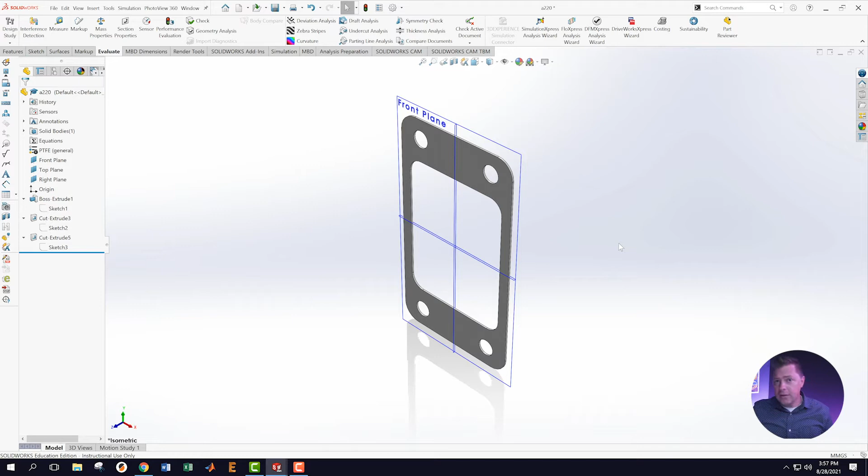The goal was to actually try out all of these different things where you learned, for example, to hit S to get to the sketching commands, or to hold shift while clicking entities and then unclicking and getting to the geometric relations. This is really what we were after in these exercises. Now, to just wrap this up, why don't we take this and put it on the turbocharger, which is not necessarily one of these activities, but we're just going to do it just for fun.

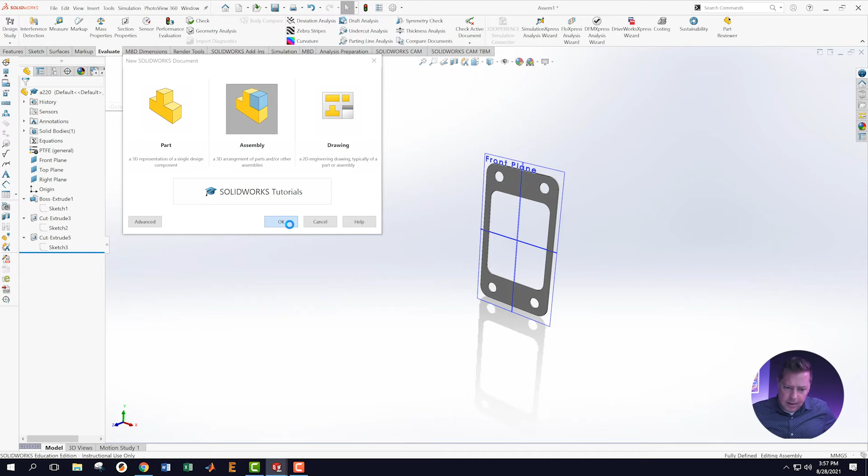Okay, let's save this thing. We are going to come in here. You don't have to do this, but we might as well just show where we're going to be at some point. We're going to have an assembly. We're going to open up our assembly. It's a brand new assembly here. It's starting to be created.

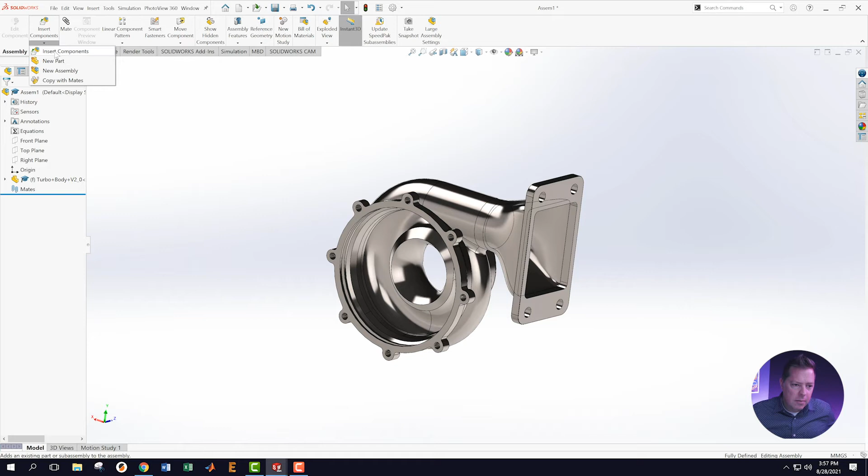I need to get some parts in here. Let's get this one. Let's place it in there. Great. There's our turbocharger. Let's go get a new part. Assemble, insert components, insert this thing. This is our gasket. These are now in the same place, in the same space. How is a gasket going to work?

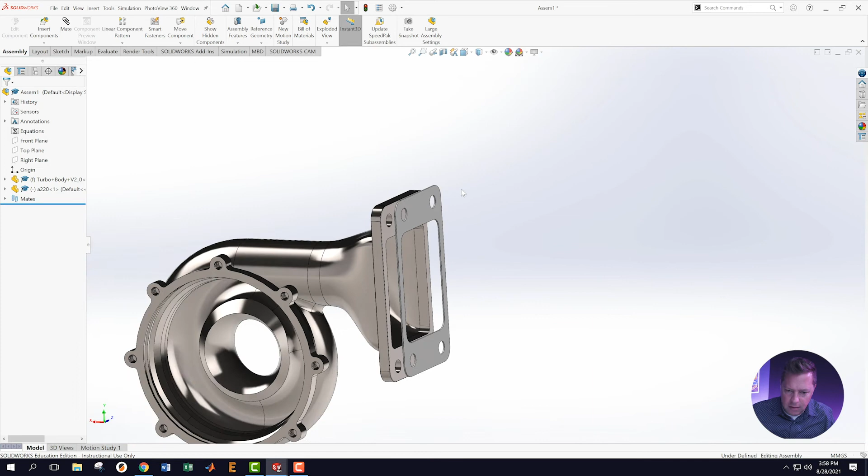I'm going to want to have this face and this face be coincident to each other. Okay, so now they're like right on top of each other. Okay, I'm going to want to have these bolt holes be concentric to each other. So I'm going to grab one of these, tell it to be concentric. And we're almost fully defined, but not really, because I only put one bolt in there, one theoretical bolt.

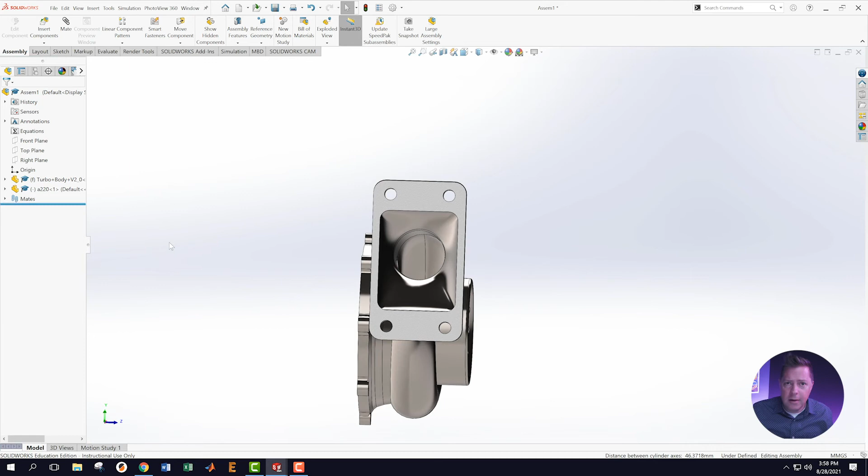You can see I have a little minus sign here in my assembly. That means I can rotate this whole thing around like that, which of course is not what we want for our gasket. So what are we going to do? We're going to come down here and we're just going to put another virtual bolt in there, basically.

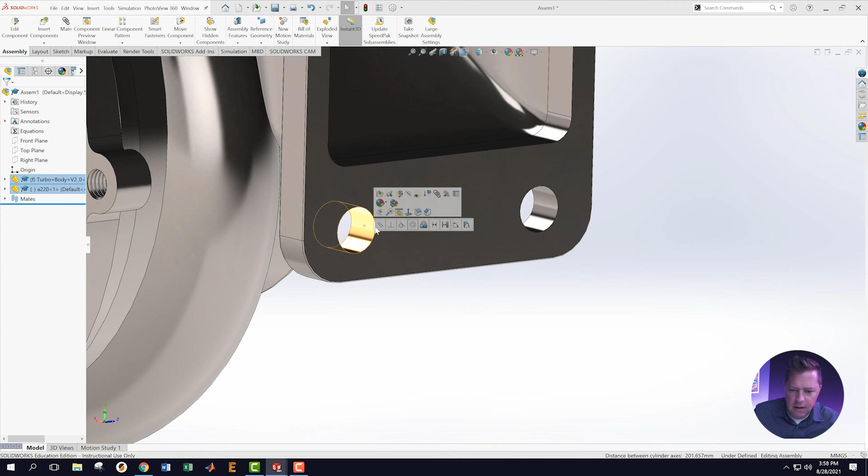Okay, I'm trying to get the surface. I can get the circle if I want, but I'm trying to get the surface. Holding shift, getting this, telling it to be concentric. Now I'm fully defined over here. And now an interesting thing for us to do is to just say, look, that is awesome. We now created a new part in our assembly.

And that's that. Okay, thank you for spending time with me on this. Hopefully that was helpful for you. Hopefully it got you through some of the process. We did it in less than 2 hours. If you slow down and press pause and these other stuff, it's a 4-hour activity, basically, to do all of these things.